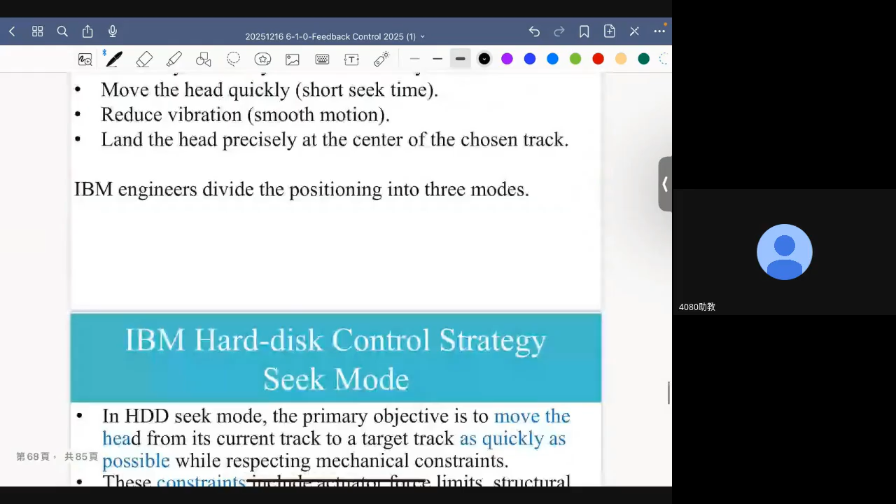Settle down, ladies and gentlemen. Okay. Today represent the last 3 lectures of this semester. Next week is the final. All right. Okay. Whenever I think that this is the last week that I need to teach for this semester, I feel relaxing. I feel happy. Okay. Now I imagine you feel pretty much the same. Okay.

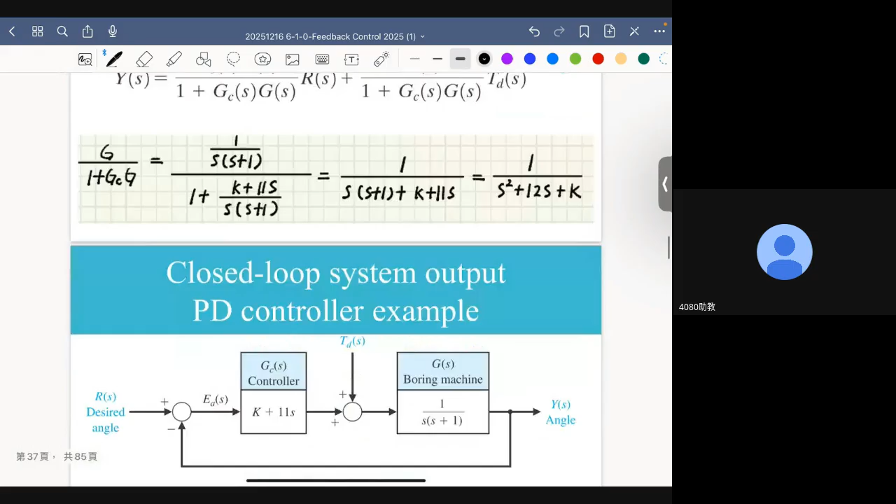Now, as I said several times, good things are ahead of you. Not just the winter section, but your entire future as a mechanical engineer, because technology has been improving rapidly, and the speed of improvement is not just fast but also accelerating. Therefore we need better engineers more than ever. We need good engineers now. We need outstanding engineers in the future. I don't know what you want to do, and I cannot tell you what you need to do in the future, but I can tell you that this world always needs good engineers.

And if you want to step up, you want to go one step further, I can also tell you that this world also needs people who can lead research teams. Okay, that is, we need research team leaders, especially engineering research team leaders. Typically those team leaders are being paid very, very well, but that's not what matters. It's the side product. The money you will get is the side product.

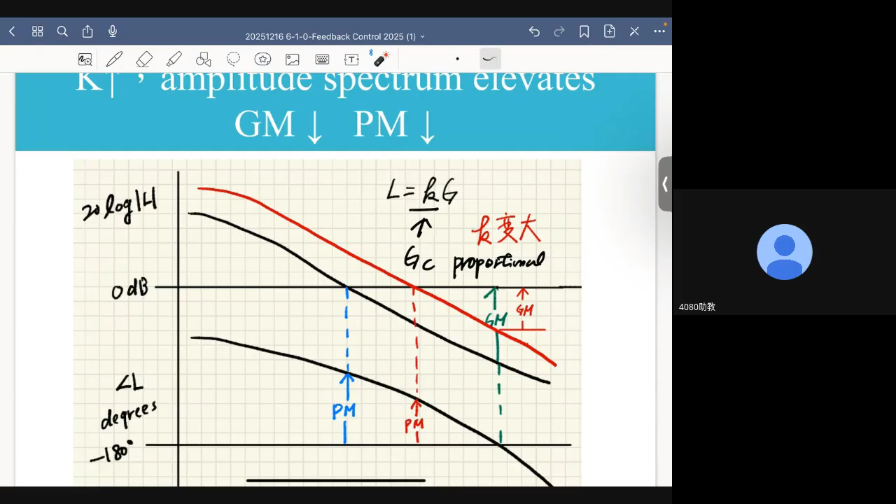The good thing about it is that you will receive a great deal of responsibility. You will have to face many challenges, but the payoff is that your work will be very creative, and you can make many important contributions to mankind. So I always say, the older I get, the deeper I feel that being a good engineer is a very cool thing. To be a good engineer, very, very cool. Okay, all right.

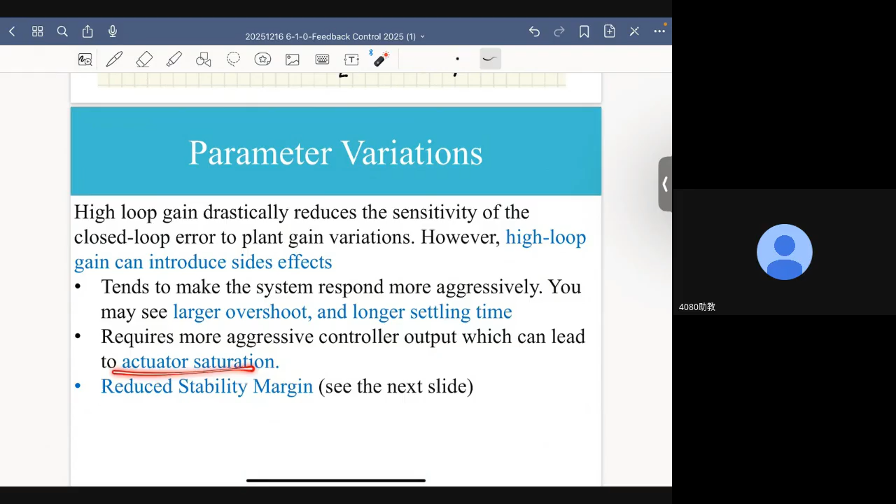Let's go back to parameter variation. Large loop gain can reduce parameter variation, but it can also induce large overshoot and longer settling time, because large loop gain means that we make the system respond more aggressively. It will also make actuator saturation a problem. It will also reduce stability margin, in particular gain margin and phase margin, which is not good for the robustness of the system.

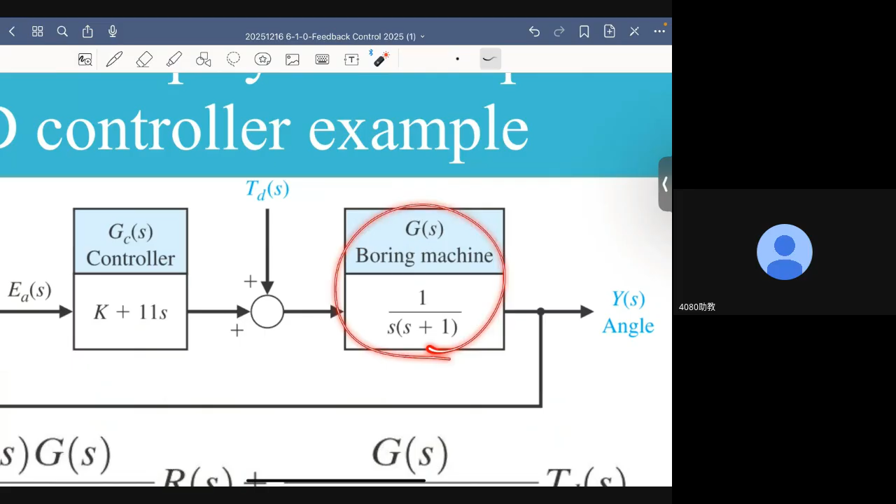Now, let's look at an example. The goal of this example is to demonstrate disturbance rejection, the disturbance rejection capability of a feedback control system. Here, this represents the system we want to control, which is essentially a boring machine, and this is our controller. As you can see, it is a PD controller. This represents the proportional control, and this with the S represents the derivative control.

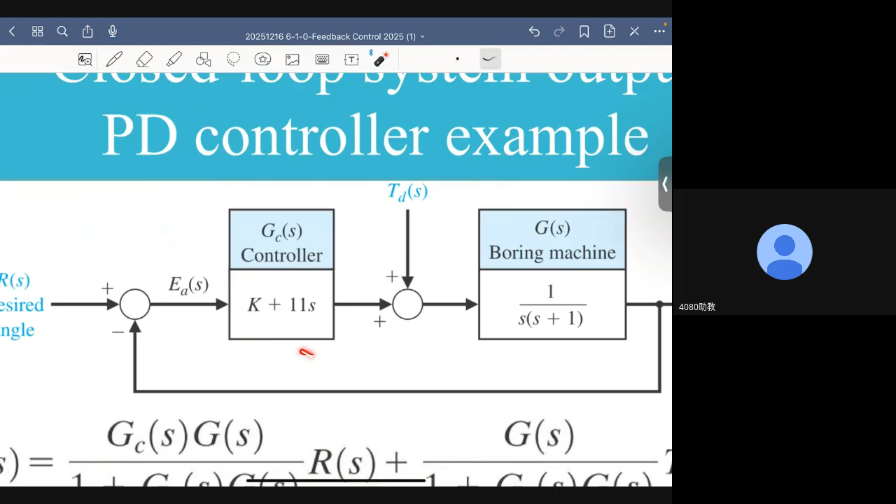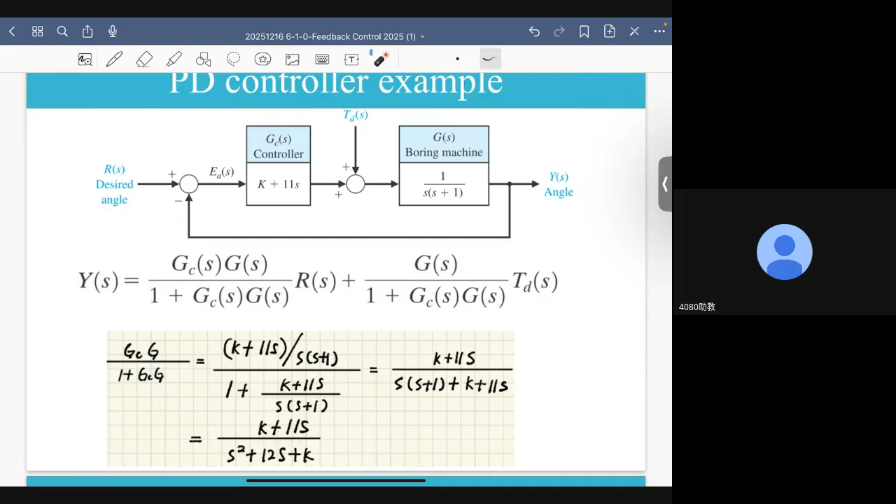All right. Now, here we have a unity feedback system, and we have the nominal input here. We have the input disturbance here, and from what we have just learned, the output should be this, without parameter variation, without measurement noise, because the focus here is on how to reject input disturbance. Reject is the term we use in control technology. When we talk about minimizing the effect of input disturbance, we say we want to reject disturbance. So let's first look at this transfer function.

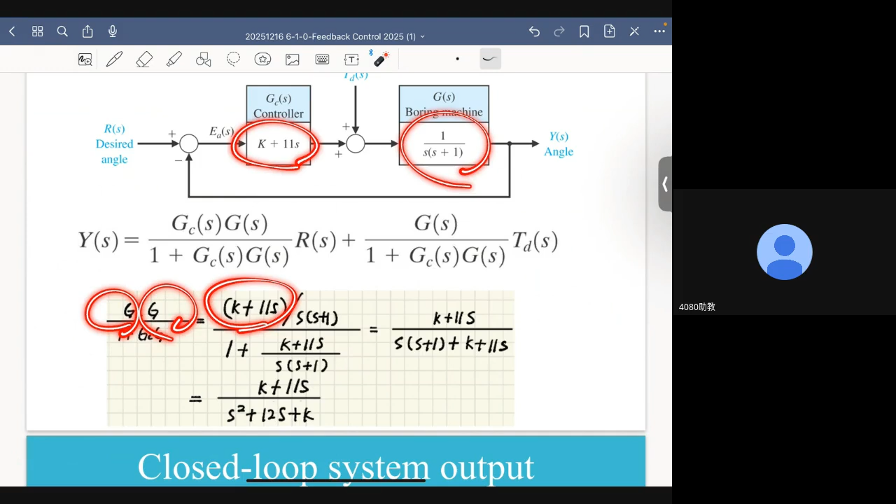Now, the equation is here. All we need to do is substitute every required term into this representation. GC is nothing but K plus 11S. G is, of course, 1 over S times S plus 1. And we can do the same thing to the denominator. To make things look cleaner, we multiply everything, including the denominator and the numerator, by S times S plus 1.

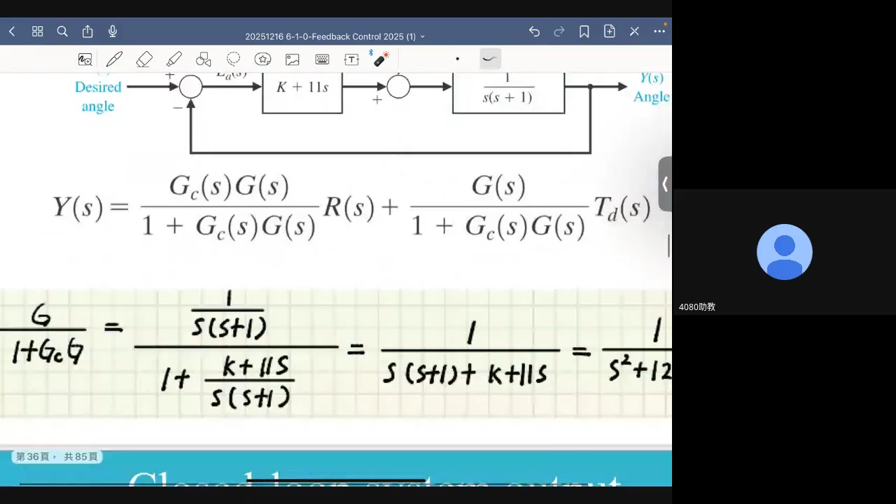Then this goes away. Then the numerator will look like this. And similarly, the denominator, by multiplying the denominator by S times S plus 1, this term becomes this. And this term, because these two terms cancel each other, what we are left with is this. So let me just rewrite this denominator as this. All I need to do is find the product of these two terms. So this represents a transfer function from R to Y. Now, I can do the same thing to this transfer function. That is exactly what we are doing in this equation.

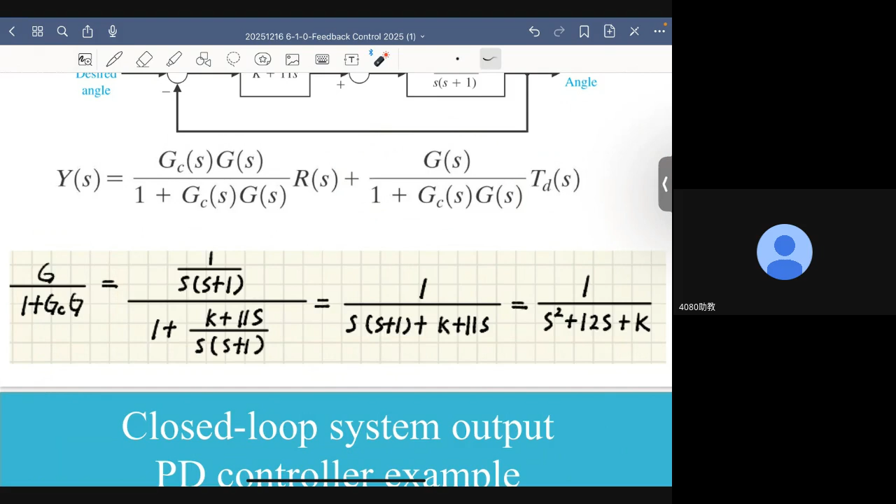I don't want to repeat the tedious math. Here, I just tell you that by using the same mathematical technique for getting this result, the transfer function between the disturbance and output is this. So by putting them together, the final output is this plus this. Remember that this term comes from here.

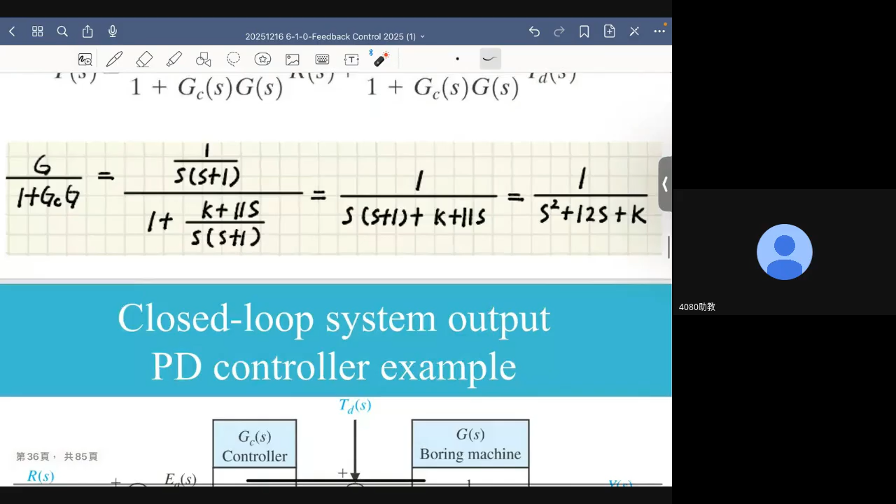And this term comes from here, okay? So this represents the overall output of the system. When I say overall, I mean it represents the contributions. The output comes from two sources. The first is the contribution from the nominal input. The other is the contribution from the disturbance. Apparently, this term is undesirable. This term is something we want to do without. We want to reject it, all right?

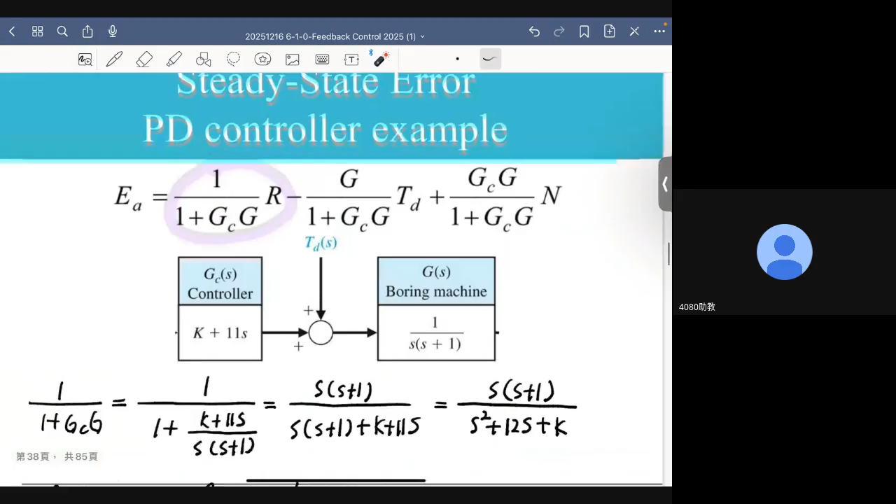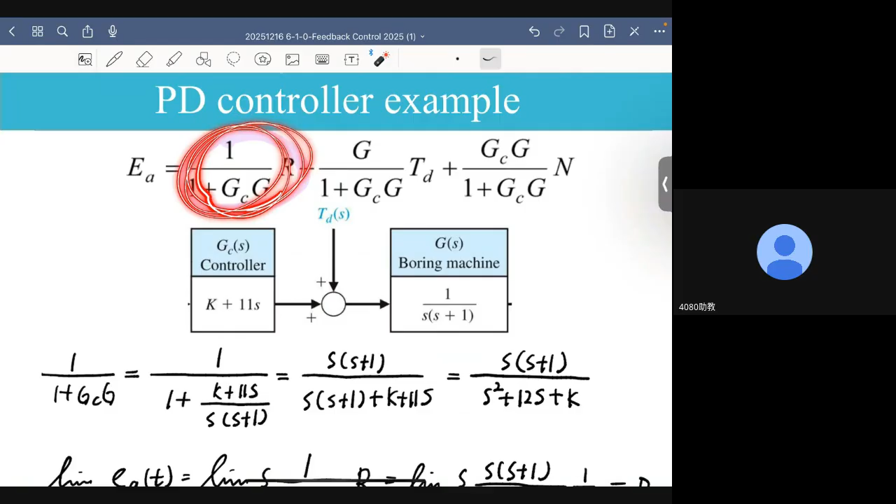By definition, we know that error is defined as this. So based on this very definition, I can represent error as this, okay? We derived this equation in the last lecture, right? So let's just ignore this term for the time being. I already know what this is, and I also know what this term is. Okay, let's just take care of this term first. What is this term? Let's just derive it term by term.

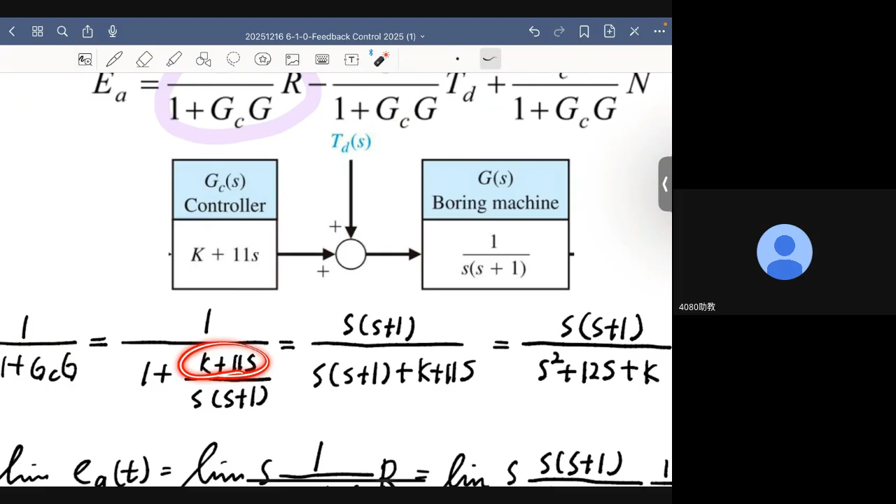Now GC, of course, again is K plus 11 S, and G is again 1 over S times S plus 1, all right? If I multiply the numerator and the denominator by S times S plus 1, this is what I will get. Let me rearrange this representation to make it clear. Then I will get the final representation for this transfer function. And remember, this is the transfer function between the nominal input and the output error.

Okay, so the output error is now another output. The actual output is an output, and the error can also be viewed as an output. In doing that, I want to understand the dynamics between the nominal input and the output error. To do that, I need to know what this transfer function is all about, and that's what I get here.

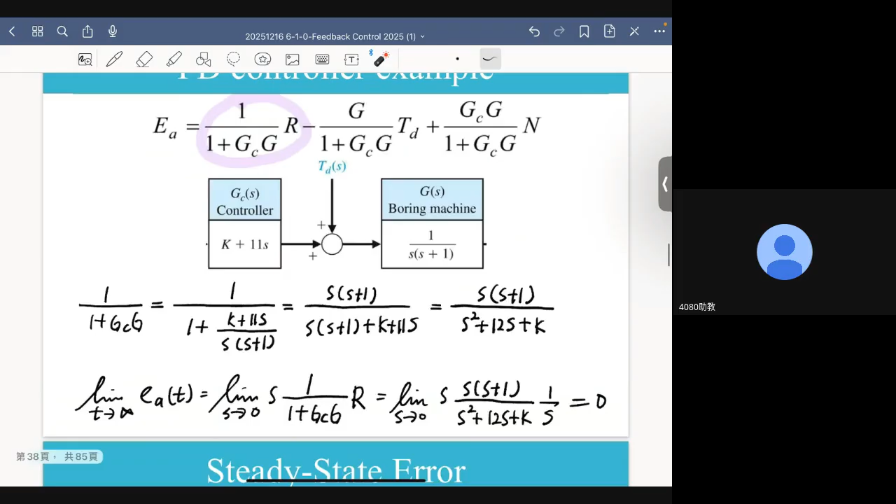Now the next part is we want to go to the time domain. After all, when it comes to error, what really matters is the time domain, especially steady state error. That is when time goes to infinity, what is the output of my system? How far away is it still from the desired output? To do that, we need to use the final value theorem, right? The final value theorem tells us that whenever you want to determine the steady state error, this is the output error.

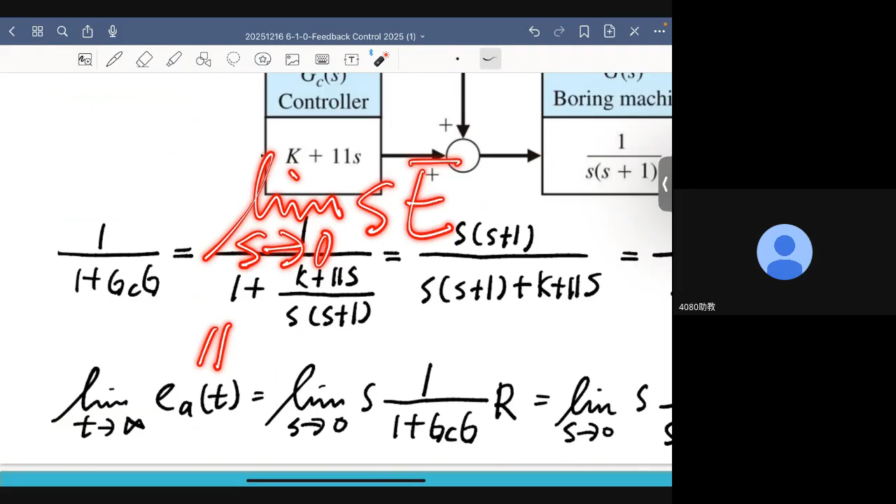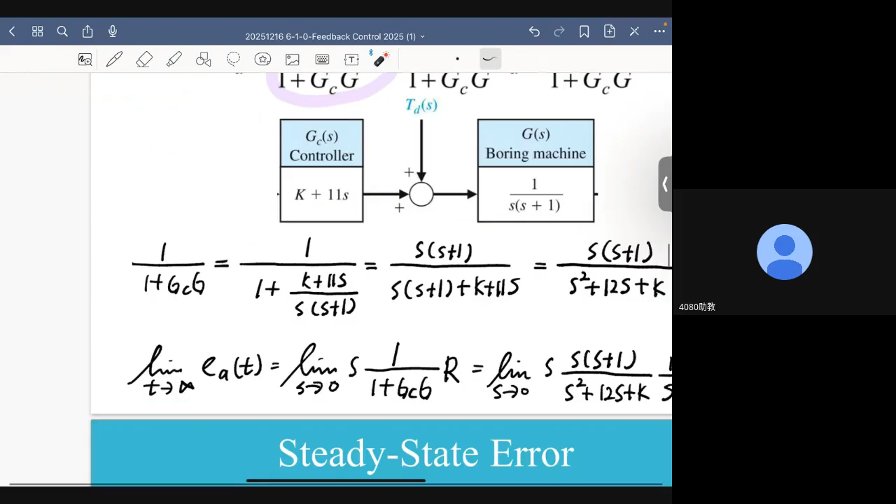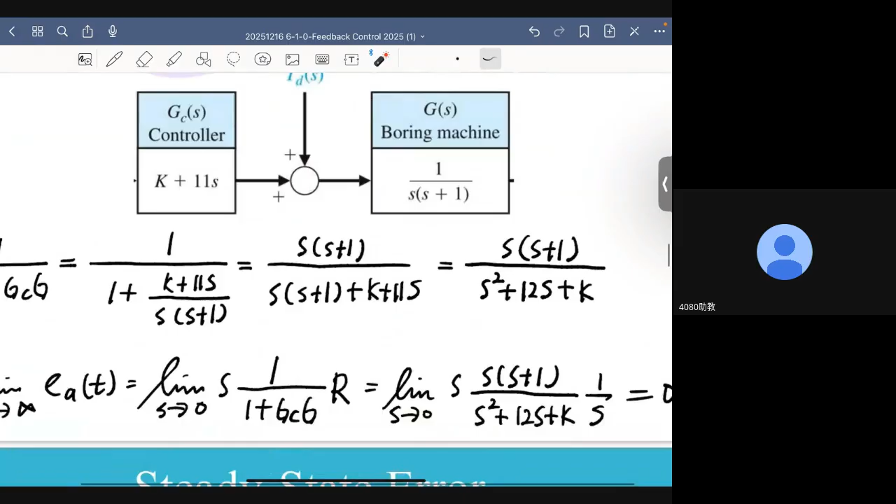When we want to know the steady state error, that is e_ss, the time variable t has to approach infinity. According to the final value theorem, this equals the limit as s approaches 0 of s times E of s. E of s is of course the Laplace transform of e of t. So by applying the final value theorem, this is what I will get. Now remember, we are studying this term. Let's assume what I have is a step input, 1 over s.

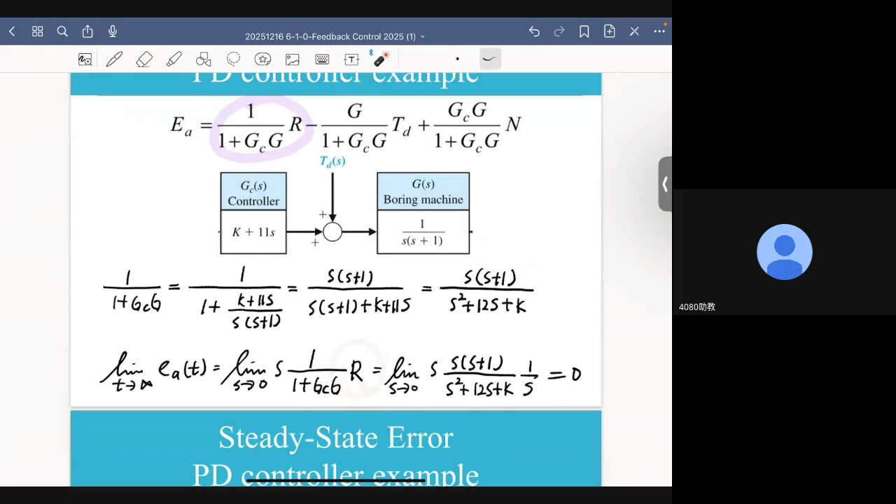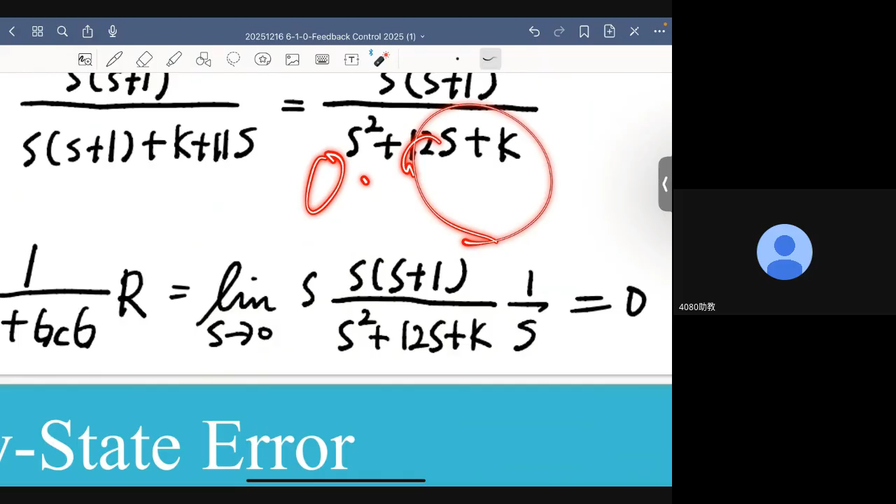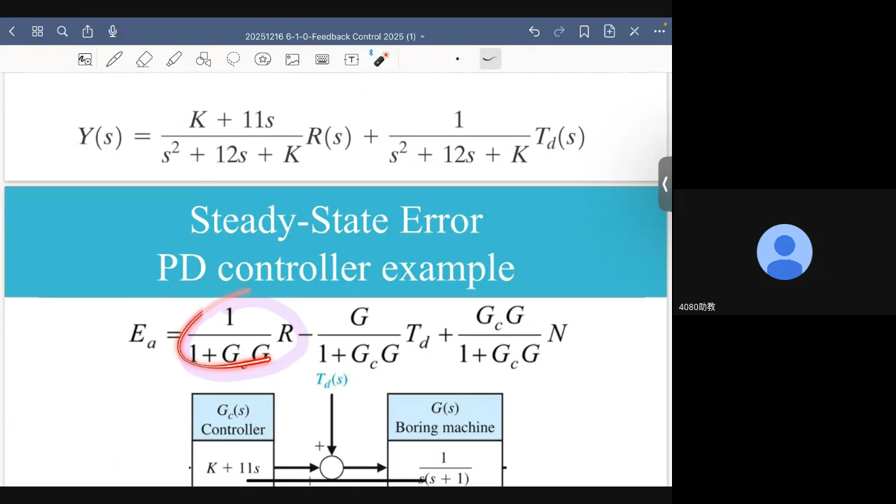If this is the case, then these two terms can cancel out, and with s equal to 0, the denominator becomes K and the numerator becomes 0, because I have an s here. Whatever number you multiply with 0, it will always come out as 0. So for the part associated with the nominal input, the corresponding steady state error component for this PD control system is actually 0.

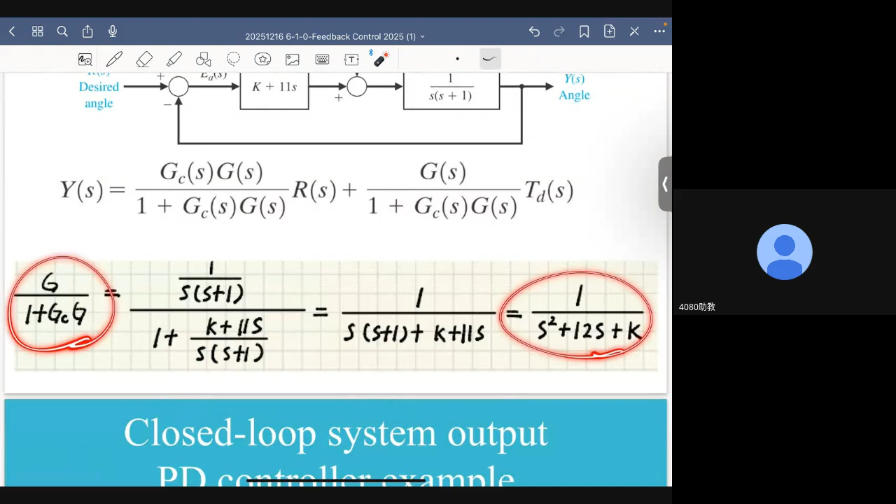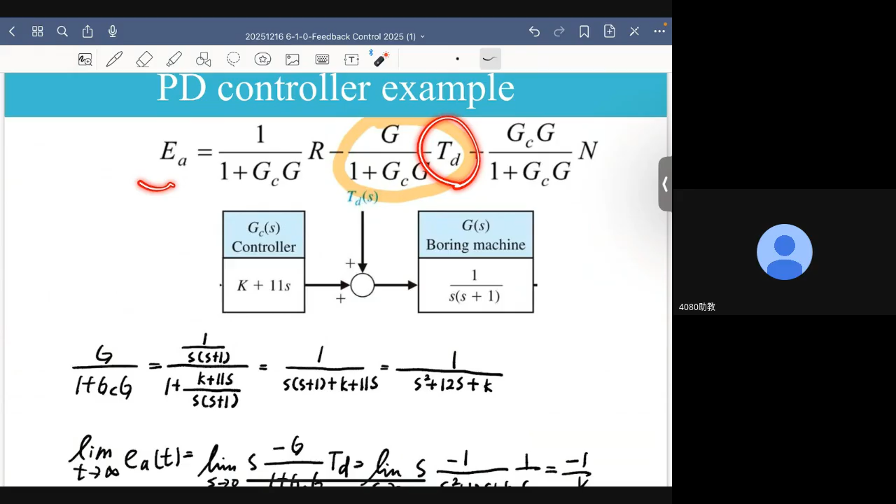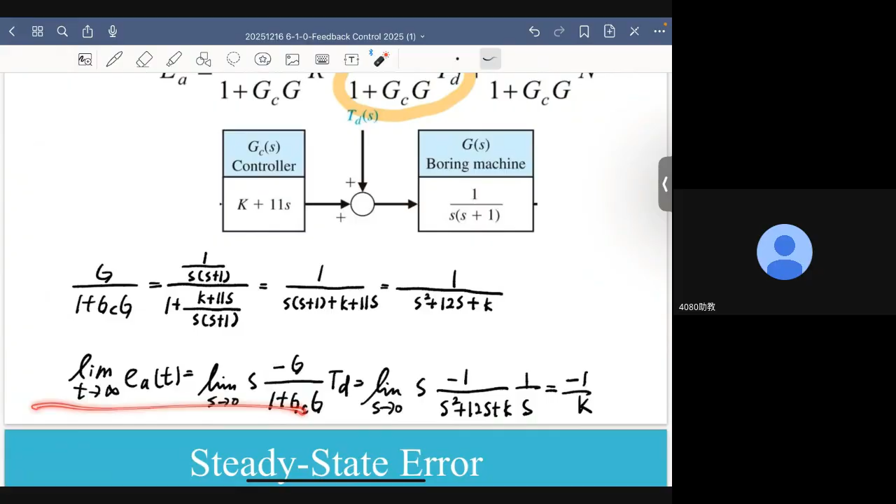Now there is another factor we need to consider, that is the input disturbance. Let's figure out what the transfer function is. I believe we have done that before. Yep, this is this, right? So this is what I get for the transfer function between the input disturbance and its output error contribution. Again, I need to know the steady state error in the time domain, so let me apply the final value theorem again.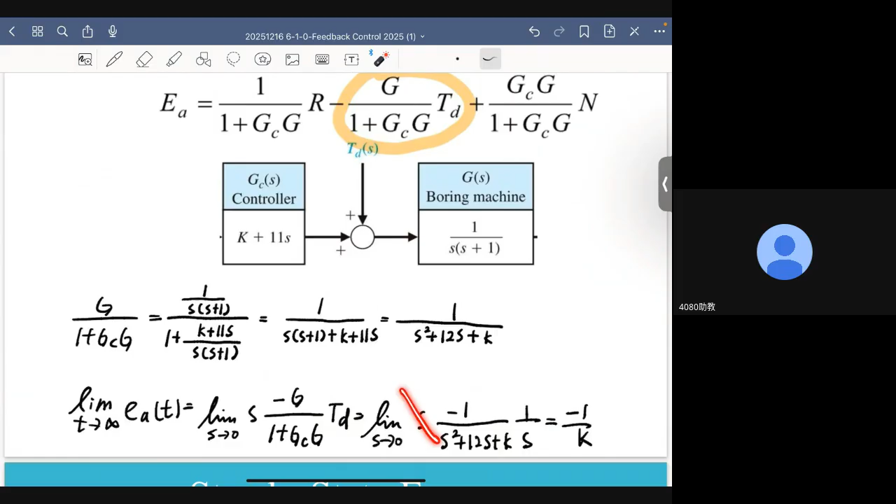Here I also assume the disturbance to be a unit step function, so its Laplace transform is 1 over s. Again, these two terms cancel out, and by making s approach 0, the final steady state error is actually minus 1 over K. So to more effectively reject input disturbance, what I can do is increase K, the gain of the P controller. The D controller, the derivative controller, cannot do anything about the steady state error, at least not in this particular example, all right?

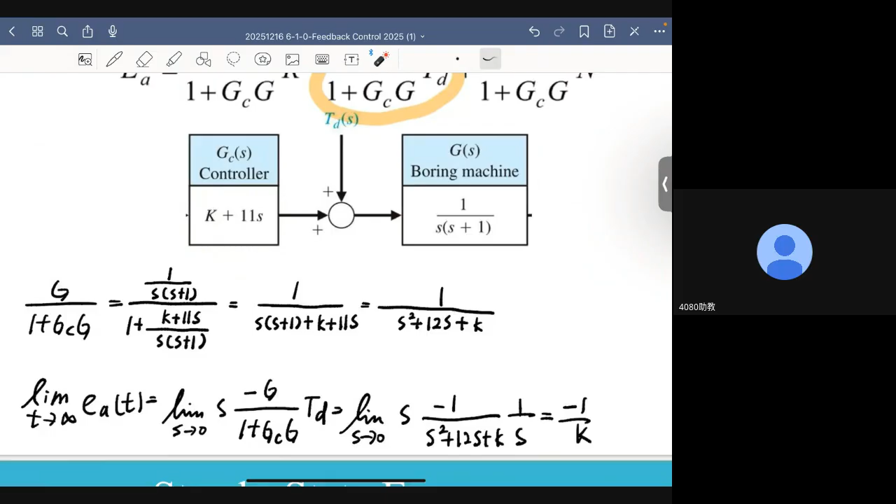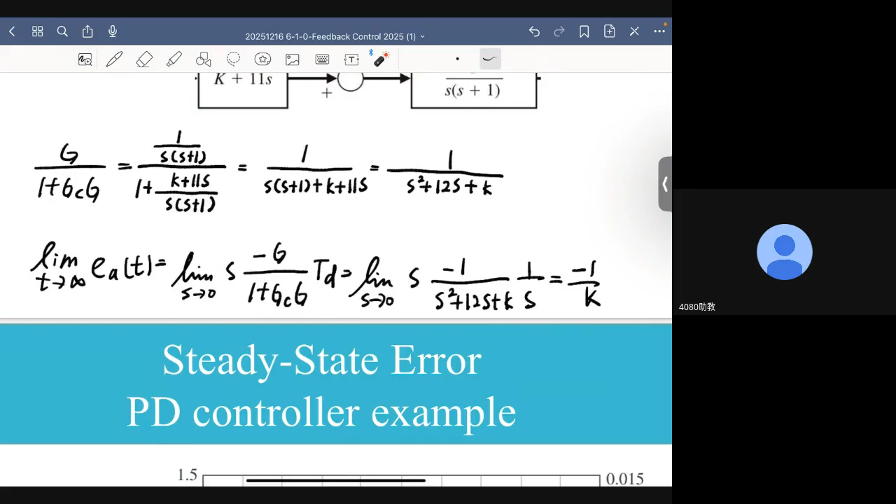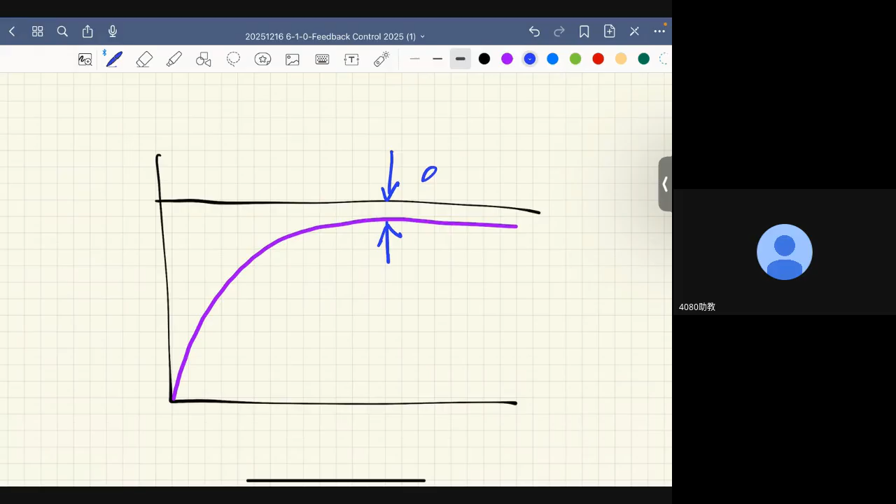Now, why doesn't derivative control matter in reducing the steady state error? Because let's assume that you have a system, okay? Now, the desired response is here. Now, after applying the PD controller, the output becomes this. So when t approaches infinity, you have a constant steady state error, okay?

Now, this error is then fed to the PD controller, Kp plus Kds. And then this controller generates an action, all right? Now, if ESS is a constant, if you take the derivative of this constant, it will produce 0. So in this regard, it is easy to see the derivative feedback cannot do anything about the constant steady state error because it is a constant.

You take the derivative, what will you get? You will get the changing rate. But since it is a constant, its changing rate is 0. Therefore, derivative control cannot do anything when it comes to reducing the steady state error, right? However, if you increase Kp, it will matter because by increasing the value of Kp, that is, by increasing the magnitude of the proportional control, you will produce a more aggressive, a stronger, corrected input, corrected force to the process, all right?

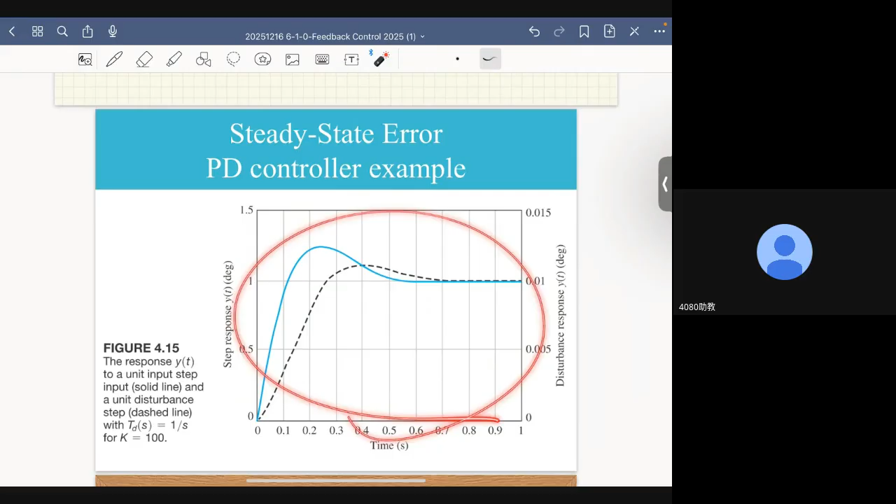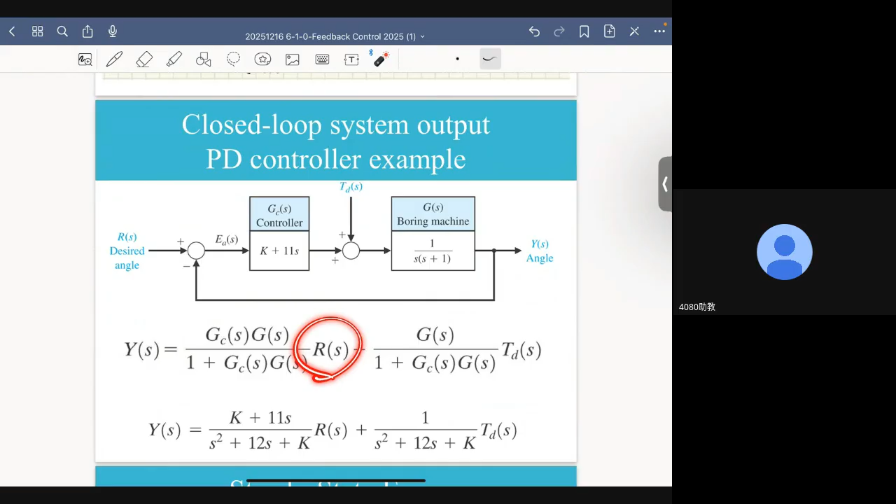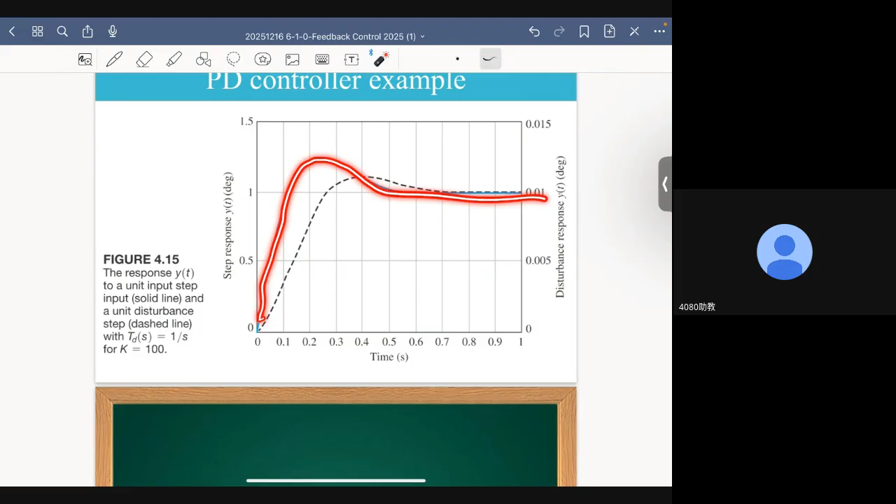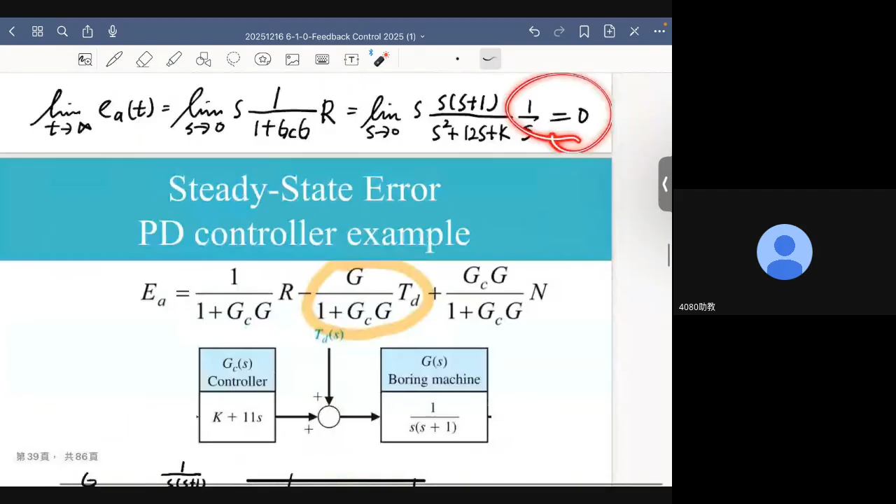Now, let's look at the results. In this one figure, I will show two responses. One comes from here, the other comes from here, okay? That is one response due to the nominal input. The other is the response, the contribution of TD to the output, okay? Now, this is the step response YT, which is this blue curve. As you will see, it has 0 steady state error, just as we expected, all right? However, for this part, we want to know the disturbance response, okay? And the disturbance response actually looks like this.

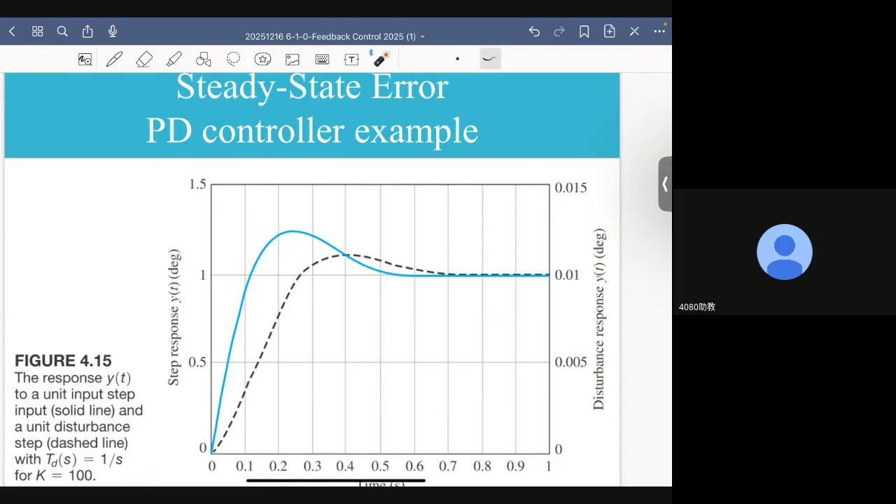Please pay attention to the fact that the numbers have different scales. Here, the number, with a unit of degree, is between 0 and 1.5. However, for the disturbance response, the unit is still degree, but its amplitude is between 0 and 0.015, okay? So when it comes to the output, the contribution of the disturbance is actually much smaller than the contribution of the nominal input. And that's good, all right? Because we don't want large error due to the disturbance. All right.

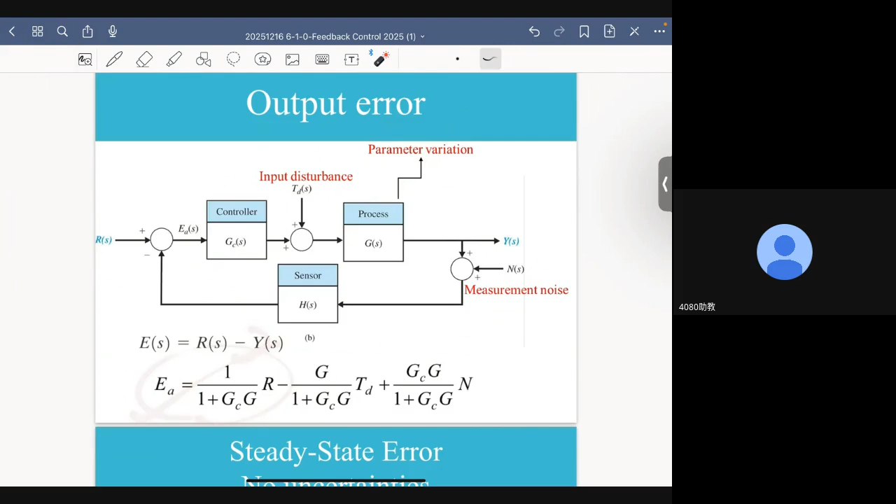So let's look deeper, okay, at the steady state error. Here, I will assume that there are no uncertainties whatsoever, which means the input disturbance does not exist. Parameter variation completely disappears, and I have perfect output measurements, which means zero measurement noise. All right. So the only output error I have is this term, that is the output error associated with the nominal input. Now, why do we want to do that? Because we want to know how to design a controller, what kind of specifications a controller needs to satisfy in order to reduce or even minimize this output error. Okay. So the only output error we need to consider is this.

Okay. As I said before, when it comes to output error, eventually we have to go back to the time domain. So we need to apply the final value theorem, okay, that is to determine the so-called steady state error. All right. Now, since the E of s is this, all right, this is my E of s. Okay, so I will use this representation to help me determine the steady state error.

Now, one major assumption. Here, I will assume my loop transfer function can be written in this so-called general form, okay? Which means here, Zi and Pk can be real numbers. They can also be complex numbers. But if they are complex numbers, they have to come in pairs. That is, we always need to have a pair of complex conjugate numbers. In the real world, complex numbers always appear in pairs. No exception. Okay. All right.

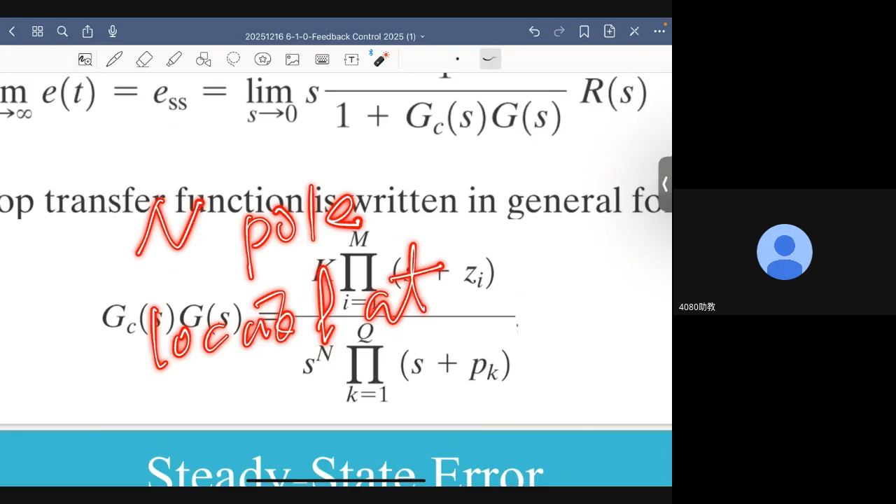Here, I assume I have m zeros. I have q poles. All right. And an additional special term is this. That is, I assume I can have n poles located at the origin. That is, I can have n poles with s equal to 0. Okay. Remember, this is the pole for the loop transfer function, not the pole for the feedback control system.

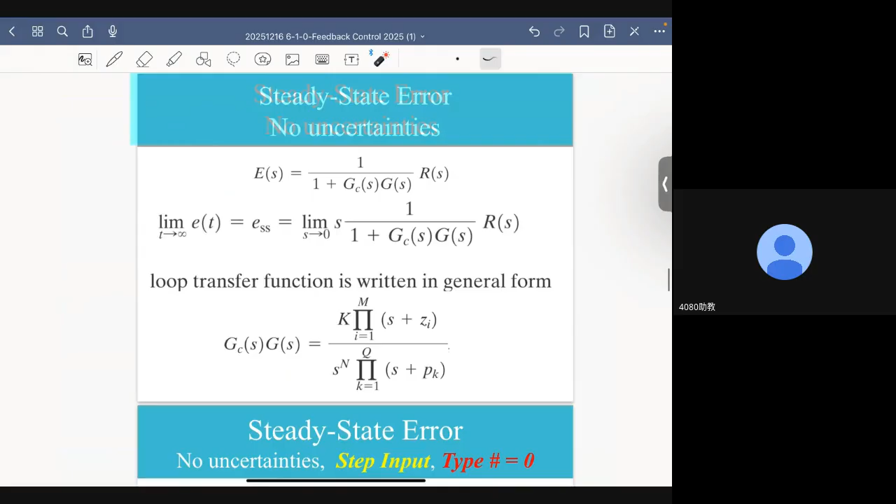Because if I have a pole located here for the feedback control loop system, that means the system is what? Marginally stable, which is highly undesirable, okay? Because we always want the system not just to be stable, okay, but stable enough. And marginally stable is just not good enough for a real feedback control system, all right? So remember, this is for the loop transfer function. The closed loop transfer function is another story, all right? Okay, now here, n represents the type number of the system, okay? Type number.

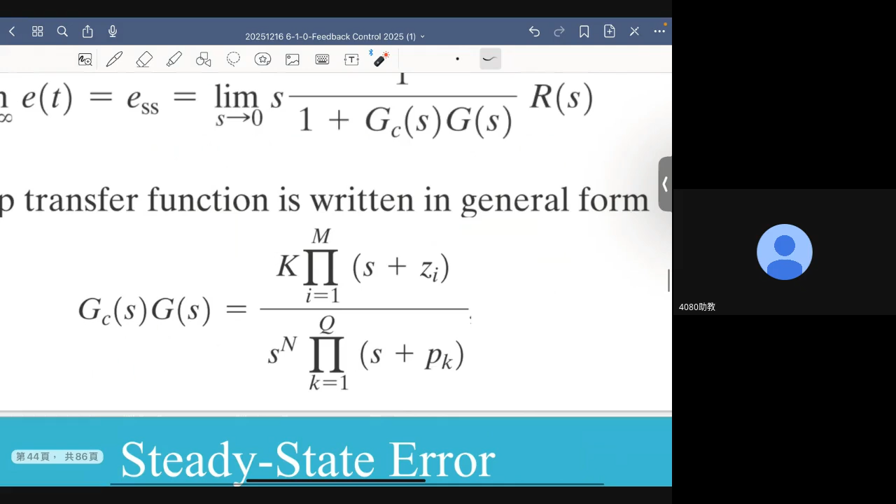And in the following discussions, the focus will be on the impacts of n, the type number of the loop transfer function. I will investigate what will happen when the value of n increases from 0 to 1 to 2, and if necessary, I can go even higher. Now, let me do this one step at a time.

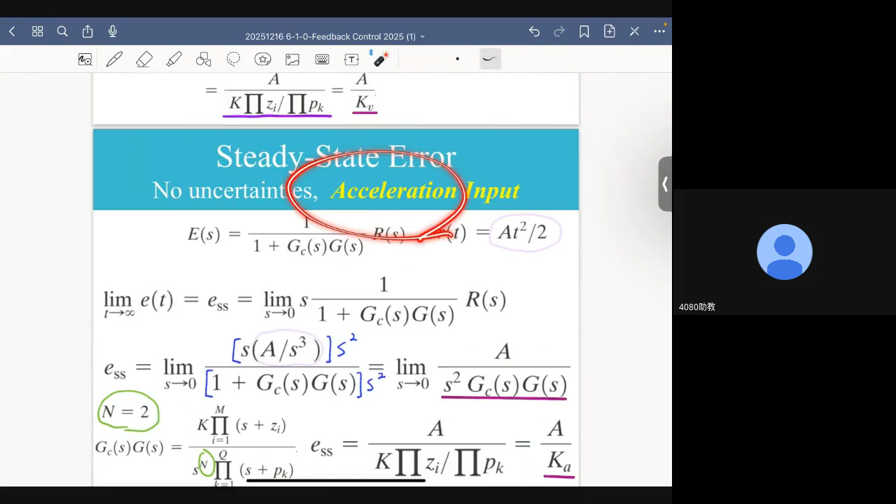Here, I will study the steady state errors from two different directions. The first direction is I will apply different inputs to the system. The first input is, of course, step input, but I can also apply ramp input. And finally, I will apply acceleration input, which looks like this. So there are three types of inputs. Why do I want to do that? Because I want to increase the difficulty of tracking.

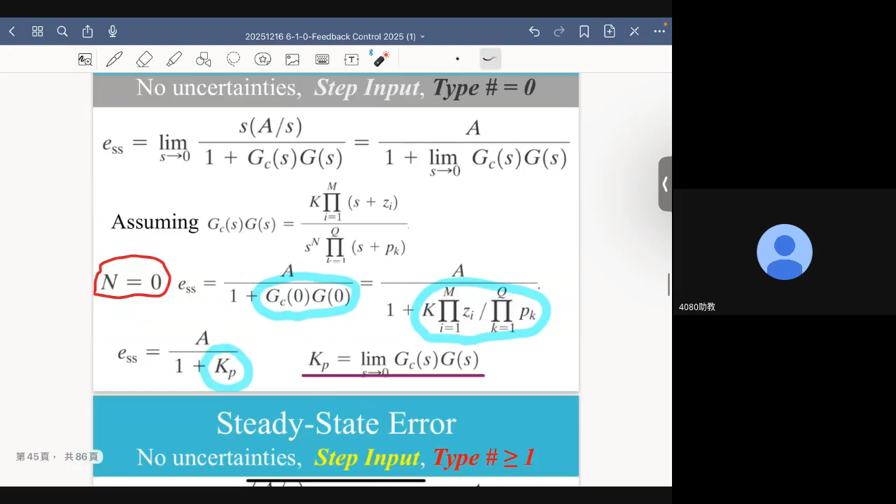Because step input represents a fixed target when it comes to control. It is nothing but a set point tracking, set point regulation problem. The target is always sitting there, so you want to hit that target. It is relatively easy because it won't go anywhere. It is always there. However, if you have a ramp input, which means the desired output is this, it always increases with time. Then what you have is a moving target. So the challenge of feedback control, of course, becomes more difficult.

Now, if you want to make things even harder, you change the input to what we call acceleration input or parabolic input, which means the desired output looks like this. It means it is not just a moving target, but the movement of that target is actually accelerating, and it becomes more challenging. Now, the faster my desired output is, the more difficult it is to reduce my steady state error, because following a moving target, especially an accelerating moving target, is much more challenging than reaching a fixed target. That's the first direction: I will use different inputs to test the system.

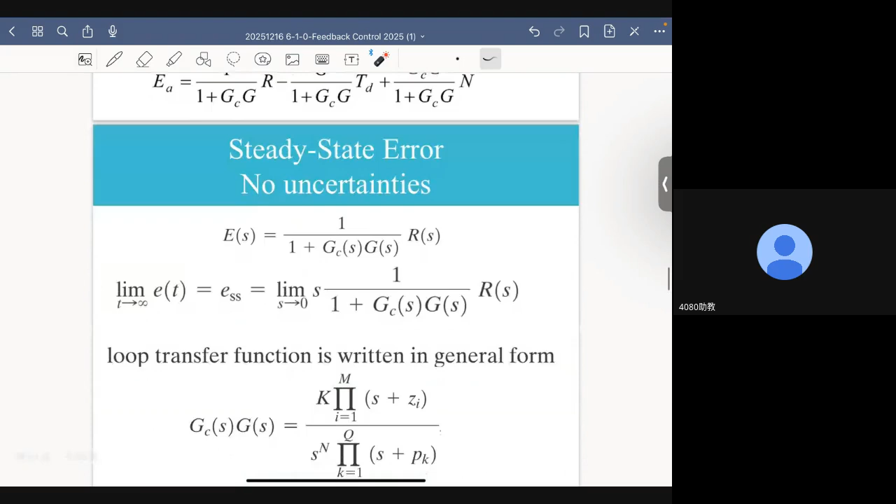Now, here, for step input, R of s is actually A over s. For a unit step, its Laplace transform is 1 over s. But let's just assume my unit step function has an amplitude of A. So by setting s equal to 0, remember that for the numerator, these two s will cancel out. This is what I will get for the steady state error in the s domain.

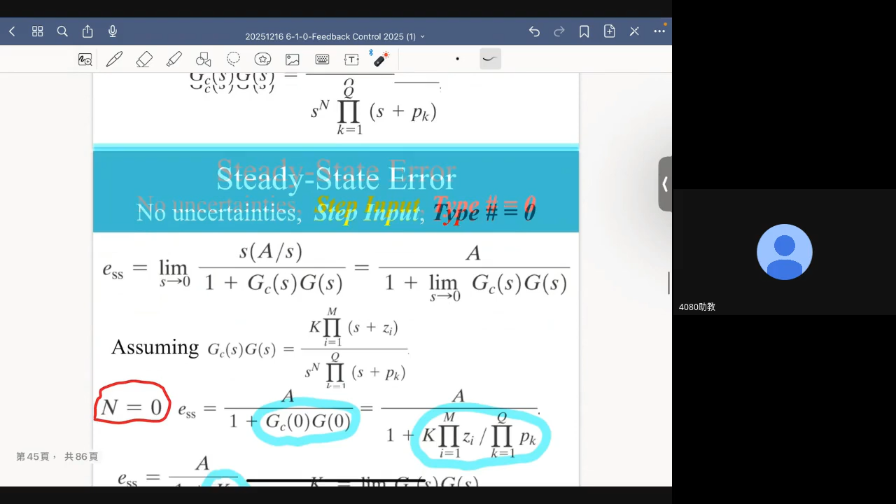Now, remember that we assume the loop transfer function looks something like this. Since this particular slide assumes type number to be 0, therefore, n here in this particular case is 0. If that is the case, then this loop transfer function will become this. Why? Because n is 0, then s to the 0 is of course 1. What we are left with is this. But here, the requirement is that s has to be 0, so all these s go away, and we end up with this. Let's just define this as Kp.

And this Kp has a name, which we call the position error constant. From the above derivation, you know this is actually this, and this is actually this. And since this is Kp, that means the position error constant is actually this. So how do I reduce this steady state error? I make Kp larger. How do I make Kp, that is the position error constant, larger? I need a larger loop transfer function DC gain. Think of it as L, which means I need L, the loop transfer function, to be larger when s is equal to 0. When s is equal to 0, we are talking about DC gain. So it makes sense, because the conclusion that we are getting is in good agreement with what we studied in the last lecture.

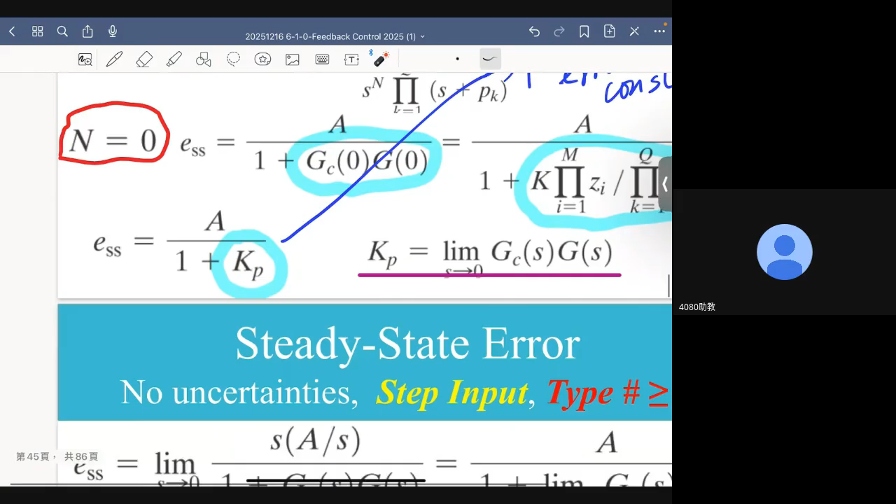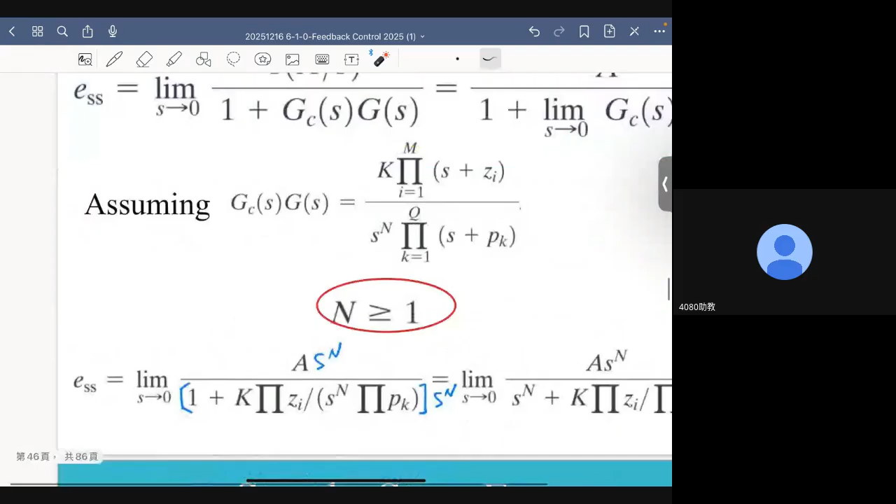Remember, what I have here is this, right? So in the denominator, I have the product of GC times G, all right? Now, also remember that s has to go to 0. So this thing goes away naturally, okay? Now, let's keep this term, s to the n, okay?

So if this is the case, then this steady state error representation can be rewritten as this. Now, to make things look cleaner, I multiply the numerator as well as the denominator by s to the n. By doing that, the numerator becomes this, and the denominator, because I cancel out these two terms, becomes this term. And by multiplying 1 with s to the n, I have this term, all right? Now, the cool thing is because s needs to be 0, this disappears. And the denominator is this constant.

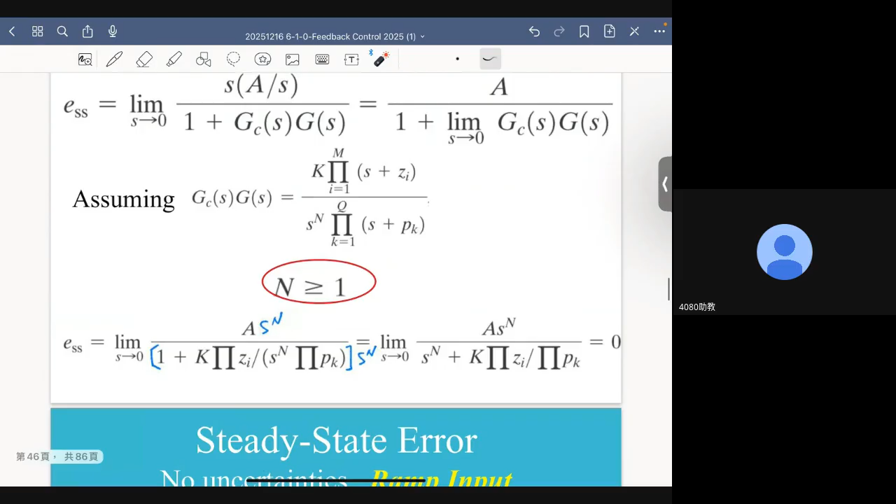But the important thing is that the numerator becomes 0, right? So whenever n is larger than or equal to 1, that is, whenever the type number is larger than or equal to 1, I will have 0 steady state error in dealing with step input, okay? So increasing the type number is really helpful because it reduces the steady state error from this to this, okay? And this is good because it can quickly eliminate the steady state error, okay? You cannot ask for more.

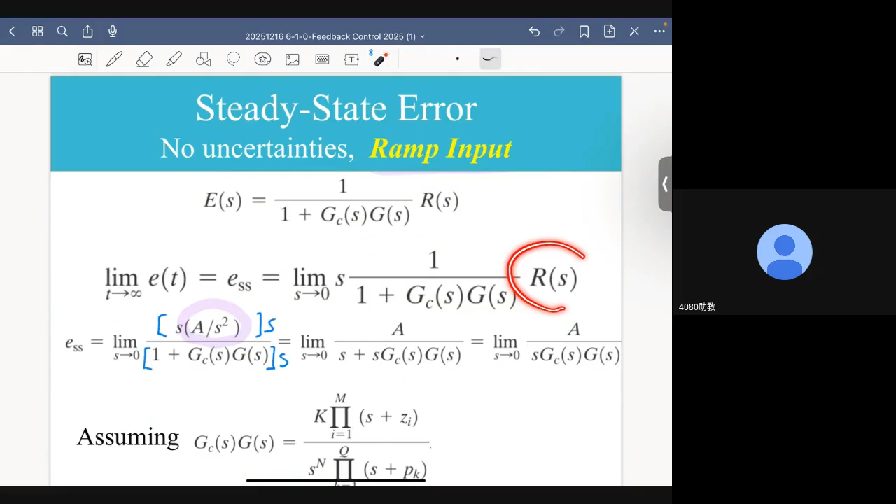Now, let's increase the difficulty of the challenge. Let's make the input the ramp input, which is, of course, a moving target. Again, I know that the error function is this. Again, let me apply the final value theorem to determine the steady state value. In this case, because I have a ramp input, R of s now becomes A over s squared. Okay, now this is nothing but a rewritten representation of this.

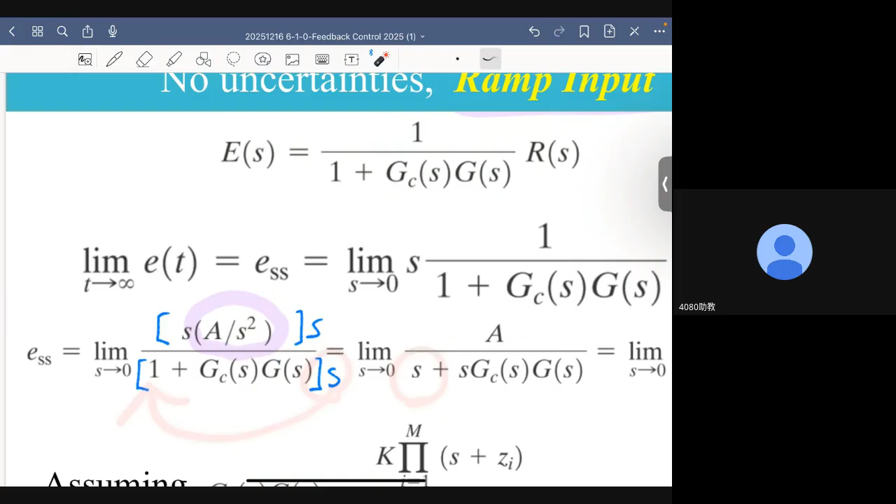Okay, now what I need to do next is multiply the denominator as well as the numerator by s. And this s cancels out this s squared, all right? And when you multiply s with 1, you will get this term. And when you tie these two terms together, this is what you will get, all right? So let me rearrange everything, okay? With s equal to 0, this term goes away completely. And this is what I end up with, okay?

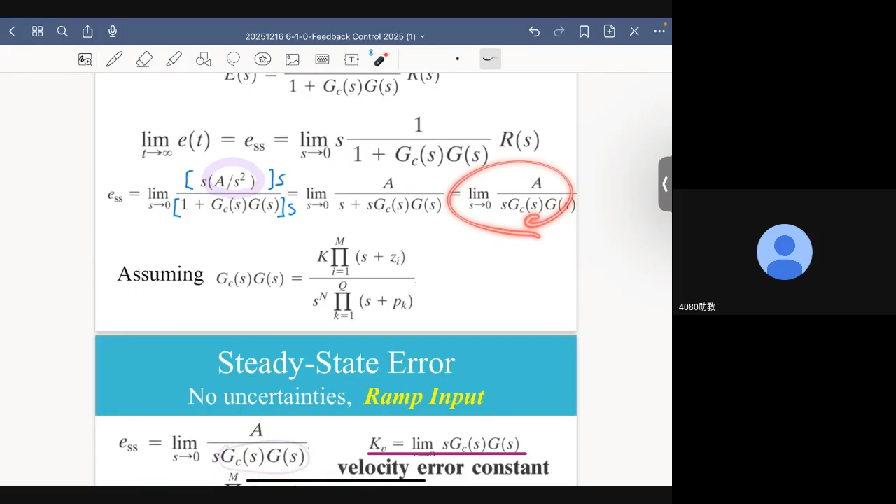Now remember, I assume the open loop transfer function to be this general form, okay? Now, let's just move this representation here. Remember that that's what I get for the steady state error when the system is facing a ramp input, okay? Now, remember this is our assumption for the transfer function. Now, when n equals 0, all right? What we will have is this becomes 1. And this s will always go away. So this becomes a number. Whatever that number is, doesn't matter.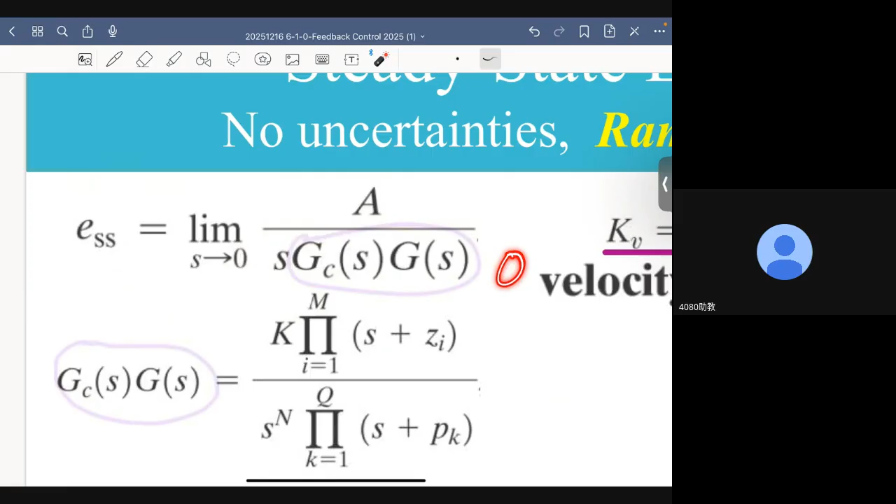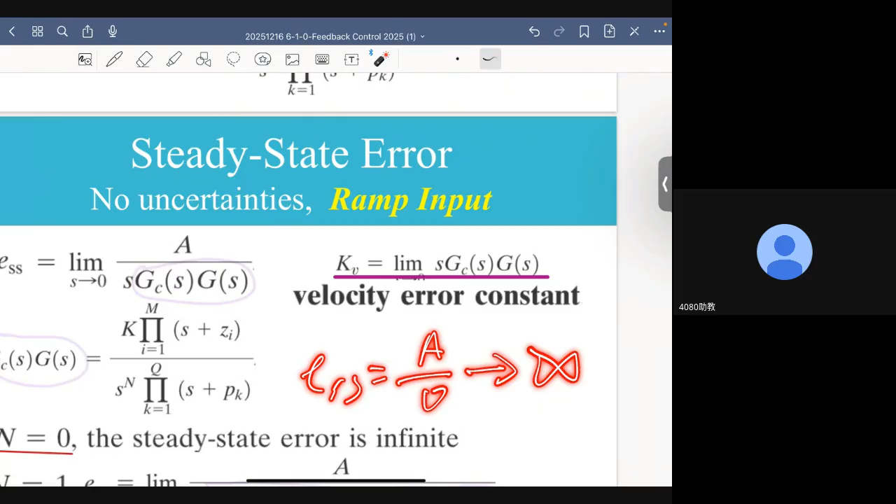The only thing we need to know is that when n equals 0, this term becomes 1. And therefore, GC of 0 times G of 0 becomes a certain number. But it doesn't matter because when it is a particular number, but this s is 0, then the value of the denominator will be 0. And ESS in this case will become A divided by 0. And it therefore becomes infinitely large. So for n equal to 0, the steady state error is infinite. The system actually explodes.

The system never catches up, okay? And the error just becomes larger and larger as time progresses. And eventually it becomes infinitely large. And that is something, of course, not nice, all right? But this problem can be fixed. All I need to do is increase the type number, okay?

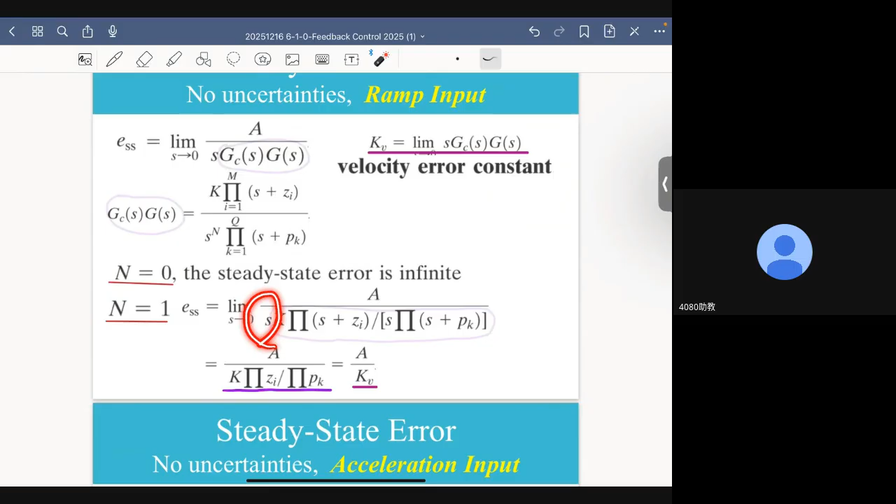Let's assume n is no longer 0, but 1, okay? If this is the case, then this additional s, which comes from here, this additional s will cancel out this s here, all right? Okay, think of, I have here, this is this term, okay? If n is equal to 1, then s to the n becomes s. And this s will cancel out this s. As a result, the denominator of the steady state error representation is no longer 0, but a fixed number.

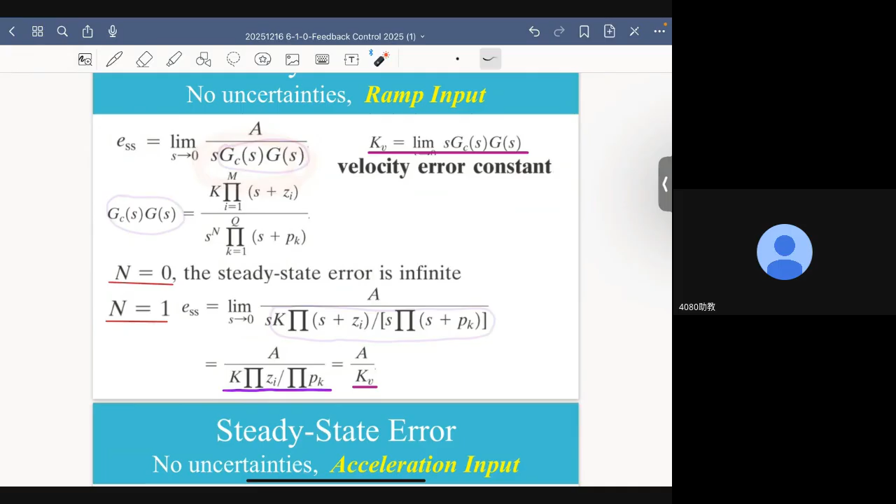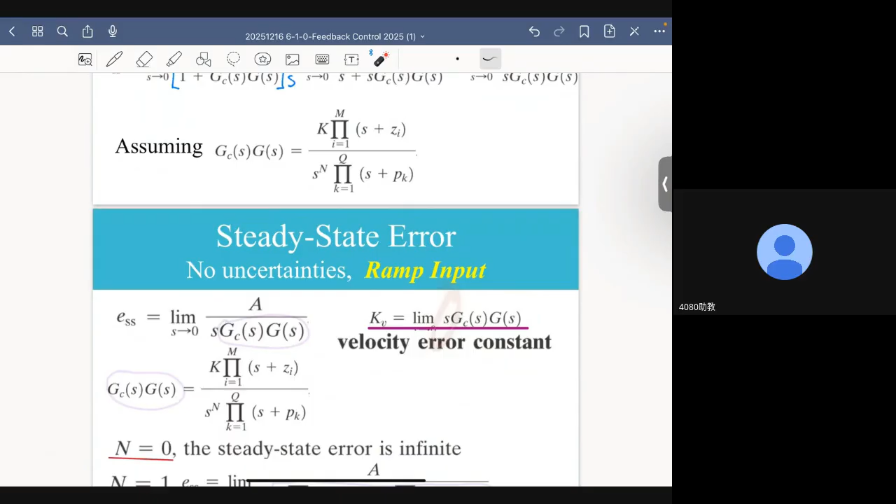And this fixed number is what we call the velocity error constant, okay? And it is actually this term, the denominator of this representation. Please be aware of the similarity between this representation and this representation, okay? This is the position error constant. It is the product of GC and G, all right? And for the velocity error constant, I still have the product of GC times G. The only difference is that there is an additional term here, that is s, okay? And by introducing this additional term into the multiplication process, I have a velocity error constant.

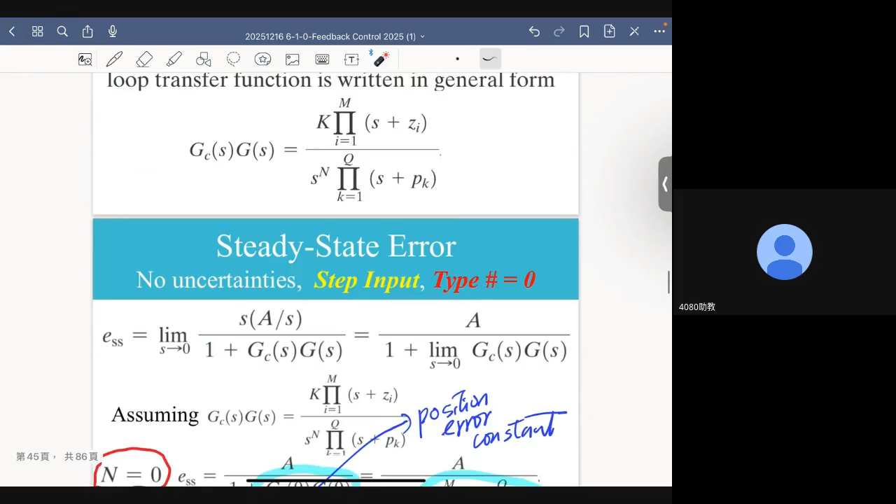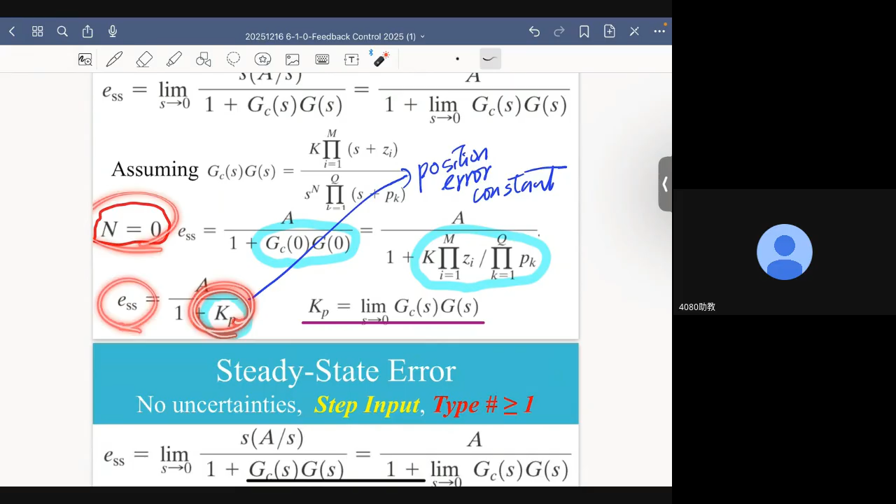And the steady state error, in this case, when n equals 1, is actually A divided by Kv. The same thing happened here. That is, for the step input, if I want to reduce steady state error when type number is 0, I need to increase the position error constant. Now, for the ramp input, when type number is equal to 1, when I want to reduce the steady state error, I need to increase the value of the velocity error constant, okay?

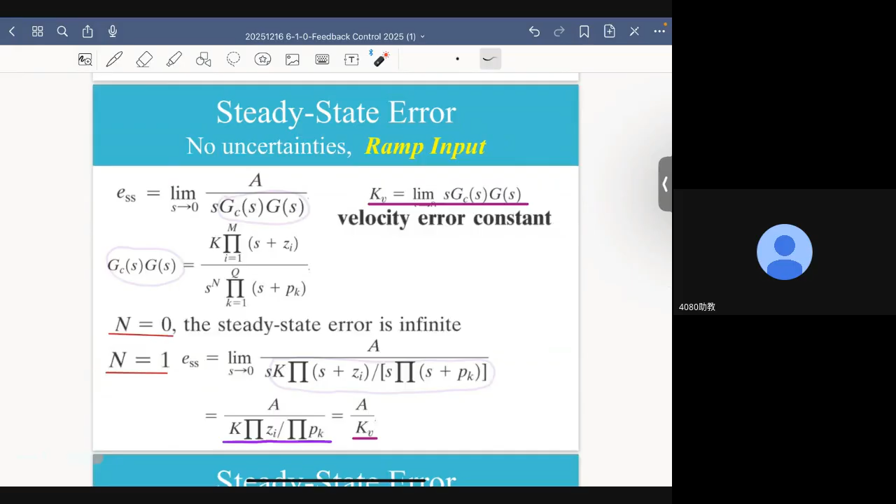So the way we deal with these two inputs is actually very, very similar. The only difference is that when the input becomes more complex, we need to increase the type number, okay? I will explain why increasing type number can produce such a positive result.

Okay, let's step up. Let's make the control problem even more challenging by using acceleration input, okay? So acceleration input means that the desired output is this. So you can see it is not just a moving target, its moving speed actually increases with time because what we have is t squared. Now, if this is the case, its Laplace transform will look like this.

By using the same mathematical techniques, I can write out the steady state error as this. This time, I will multiply the numerator and the denominator by s squared. So these three terms will cancel out with one another, okay? And with s, I will times 1 with s squared, okay? And since s approaches 0, this term I can just drop out. So what is left for the denominator is this, all right? Is this, okay?

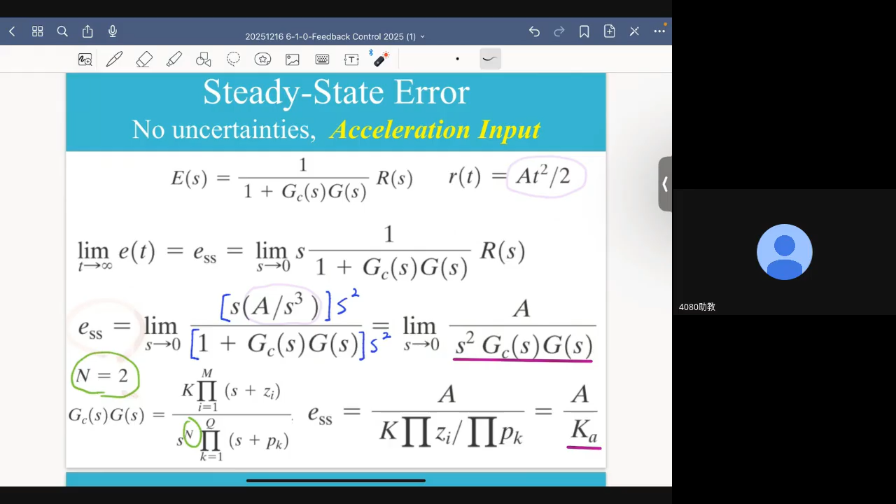Now, this can be a problem because when s approaches 0, this denominator can have a value of 0 and it will explode, which means that we will have infinitely large steady state error. The only way to avoid this unfavorable situation is that somehow this s squared term can be taken away, all right?

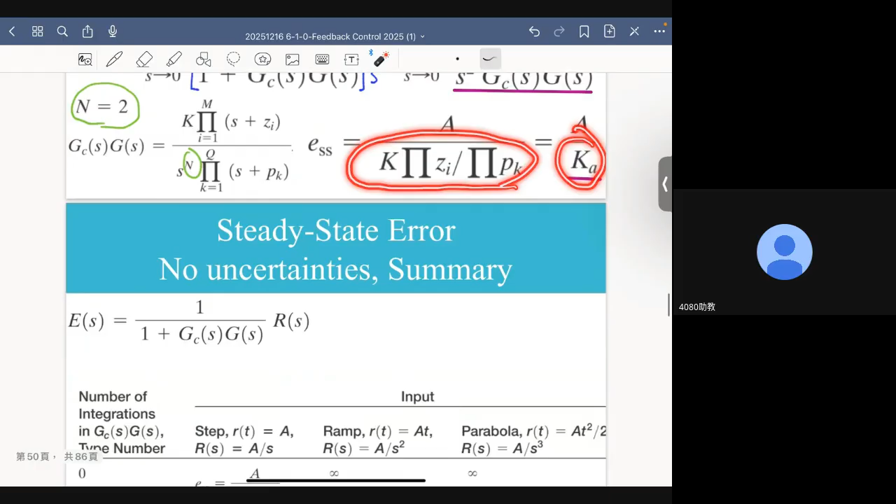How do I do that? Let me examine what I can do for the loop transfer function. Remember, the loop transfer function looks something like this. If the type number is 2, then this s squared will cancel out this s. So if that is the case, then this steady state error will look something like this. Well, the denominator here is defined as the acceleration error constant. All right, this is the acceleration error constant.

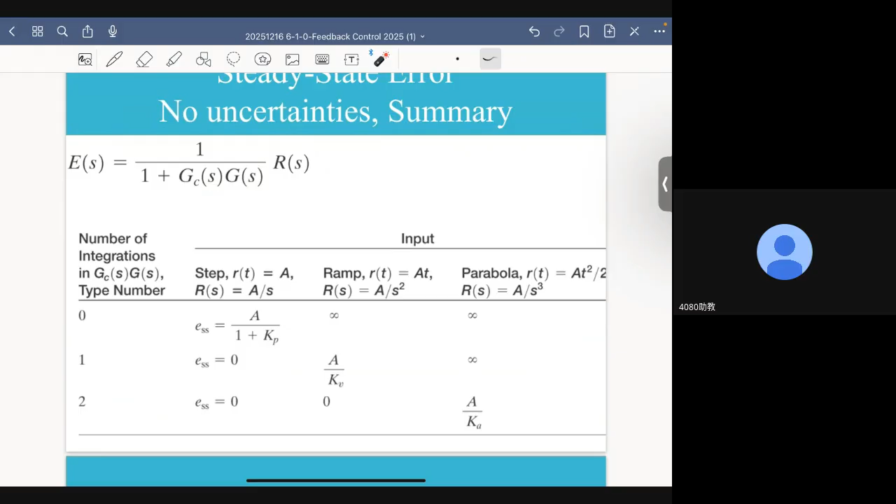So let me summarize all the results that we just presented. Okay, remember that what we are studying is the output error due to nominal input. Here we do not consider any uncertainty. We assume zero input disturbance. We assume there is no parameter variation whatsoever. We assume perfect measurement, no measurement error whatsoever. All right. So for this part is different type number.

Okay, in the vertical axis, in the horizontal axis, what we are seeing is for different columns, we have different input. Here, step input. The next column, ramp input, and then parabolic input, which is acceleration input. Okay, the content of this 3x3 table is actually steady state error. Okay, when facing a type 0 system, when facing a step input, this is the steady state error. But for such a type 0 system, if you want to deal with ramp input or parabolic acceleration input, you will get what? You will get infinitely large steady state error.

Okay, if you want to improve this situation, what you can do is increase the type number, and the steady state error will be reduced to A over Kv. And if you want to go one step further, just increase the type number again. Now increase it from 1 to 2, and then you have 0 steady state error. So everything we have done for studying steady state error due to the nominal input is summarized in this table.

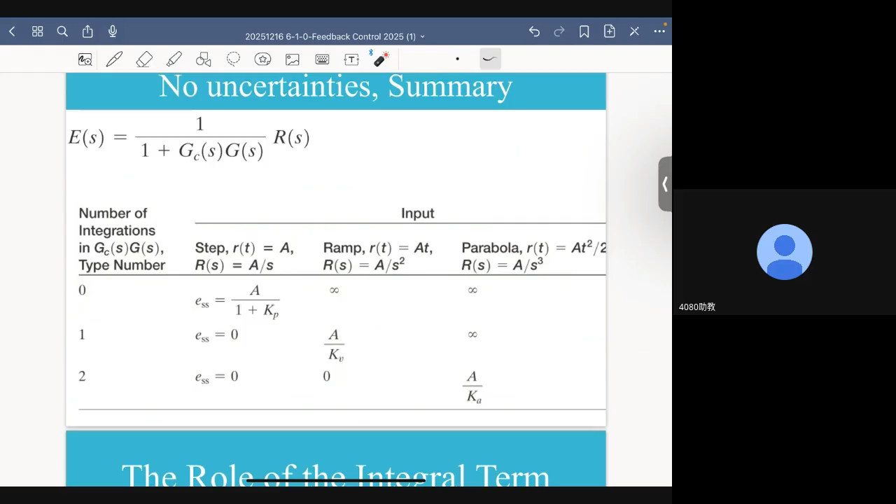Okay, now why does type number matter? Where does the magic of type number come from? Remember, type number actually represents s in the denominator, and it represents integral action. When type number is equal to 1, it means you integrate the error once. When the type number is 2, it means you integrate the error twice. In calculus, we call that a double integral. So you can perform a single integral. You can also perform a double integral, okay?

So the integral component in a controller, such as a PI or PID controller, what does it do? It calculates its output based on the accumulation of the error over time, okay? So integral control actually considers the history of the error, because after all, it accounts for the accumulation of the error over time. And that is what results in a so-called driving error to 0 action, all right?

Okay, let's take a 10 minute break.